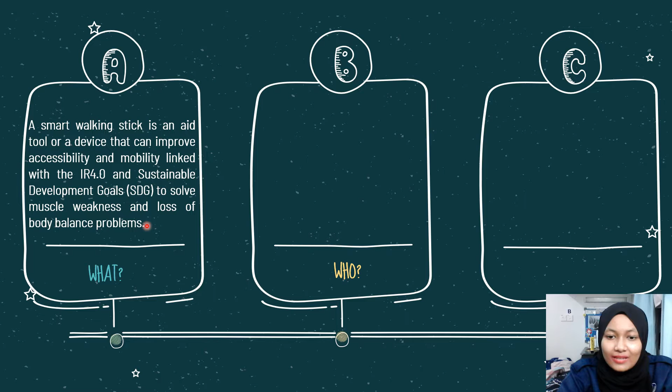Second, who are the main target users for the smart walking stick? The main target users of the smart walking stick are elderly people. So, who are elderly people? Conventionally, elderly people have been defined as a chronological age of 65 years old or older.

Next, how the smart walking stick operates. First, it supports the user's weight while sitting, standing up, and walking. Second, it monitors and tracks user movement. Third, it triggers an alarm if an emergency happens.

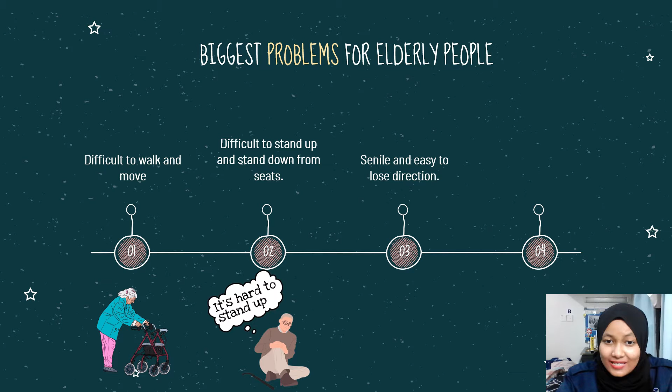The second part is the problem statement. In this section, I only highlight the main problems that often happen to elderly people. There are a few biggest problems or issues that usually happen to elderly people. First, difficult to walk and move. Second, difficult to stand up and sit down from a seat. Third, senile and easy to lose direction. Fourth, difficult to ask for help when falling.

Hello everyone, I will explain the survey analysis part. This survey has been conducted with 100 respondents from walking cane users and relatives of the users. Problems faced by users: for the survey analysis, the majority of the respondents chose strongly agree on the problems. There are not a lot of facilities for senior citizens in their place, by 32.67%, and second, the users have to hold on to something when walking without the walking cane, by 37.62%.

Next, the majority of the respondents chose agree on the problems. The user has to sit after walking for a while, by 44.55%. Their leg feels weak when walking, by 39.6%. And lastly, the user wobbles while walking, by 38.61%. The solutions provided include safety and practicality elements to be implemented into our project and prototype.

For the possible solutions provided, most of the respondents agree with all the solutions, and the highest percentage is the walking cane having a stable element under the cane, by 68.32%, followed in second ranking with 54.46% by the walking cane having a location tracker, which is GPS, global positioning system, to track their location.

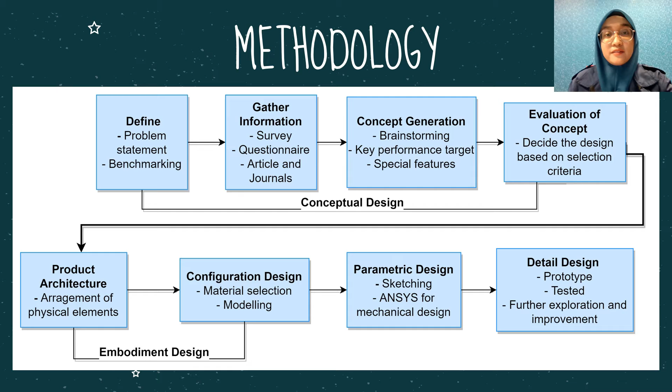Lastly, in detail design, we produce the prototype and test it. We also made some improvements and further exploration to produce the best product for elderly people.

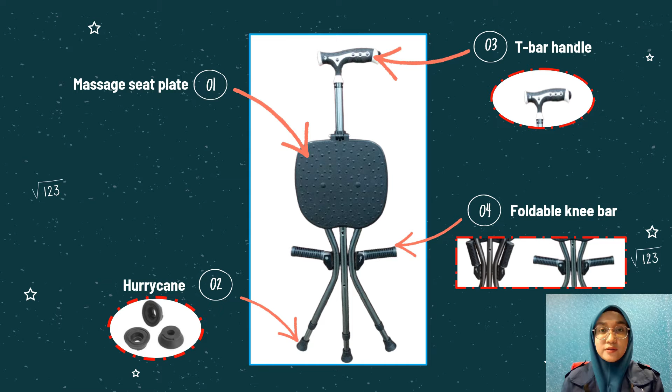The next slide is the selected design concept. This is our smart walking stick for elderly people. The features included in our product are a base plate that can support a maximum weight of 226 kg, rubber feet that work as anti-slip and increase friction when the user is using it, a T-bar handle whose design is comfortable and easy to grip, and a knee bar that can help elderly people whenever they want to get up or sit down without needing other support. The knee bar can also be folded to save more space.

For the LED light, it can be adjusted for high beam and low beam. For the master lock, the user can adjust the height of the smart walking stick at 5 adjustable heights. In the circuitry box, there is storage for the circuit that controls the system of the smart walking stick.

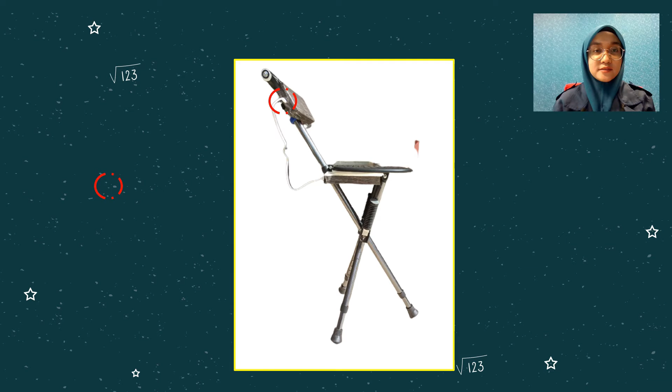Next is the USB charging port. The USB charging port is the place where the power bank is located. The user can recharge the battery when it is at low power. Last but not least, our smart walking stick also includes a 3-leg base to support the user when walking and sitting.

Next, key subsystems. This is the physical decomposition of the smart walking stick for elderly people. From this physical decomposition, there are 4 main subsystems that define our smart walking stick system, which are power supply, Arduino or microcontroller, electronic, and substructure.

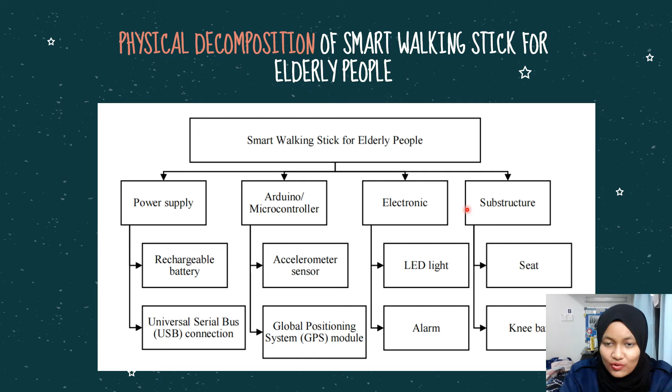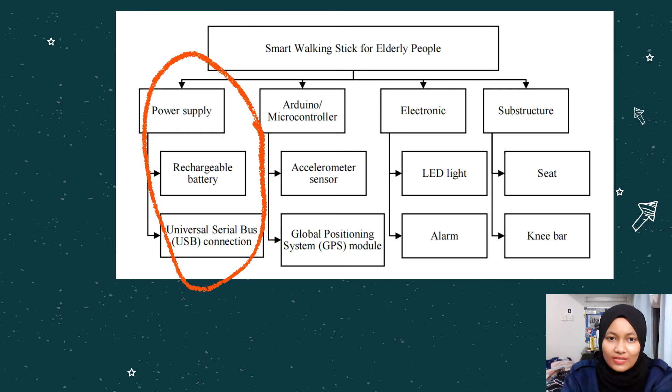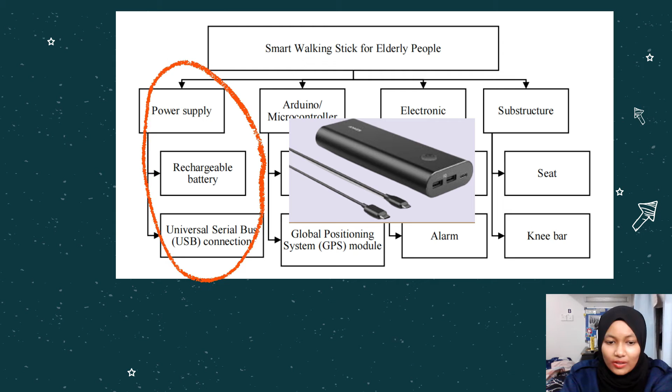First, the power supply subsystem has a rechargeable battery and a universal serial bus (USB) connection. In this project, we use a power bank as the rechargeable battery to supply power to the smart walking stick system. Then USB is provided to carry power as well as a signal to recharge the battery.

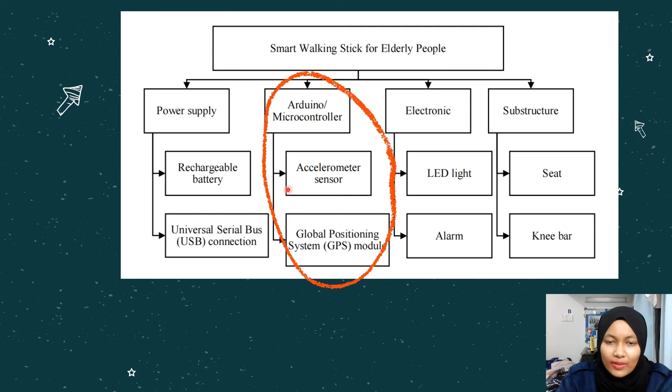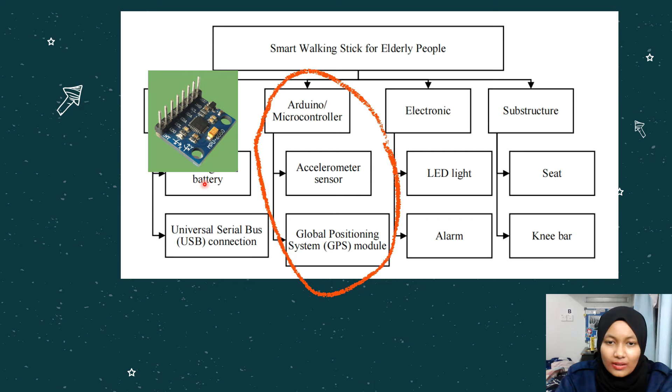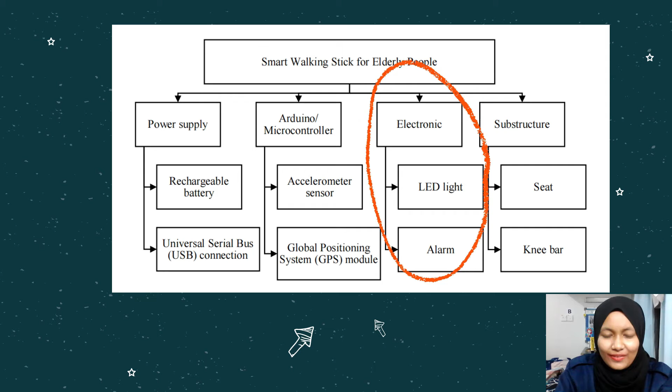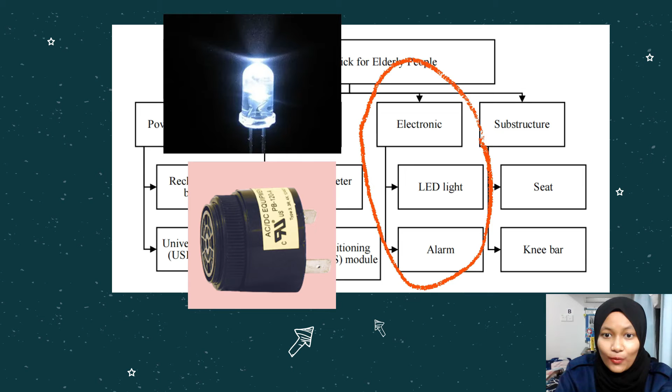Lastly, the substructure subsystem. This subsystem consists of the seat and the knee bar. The massage seat plate is designed to provide extra comfort to the user and prevent the user from slipping when sitting. The knee bar design has an artistic feature that provides balance while users stand and sit.

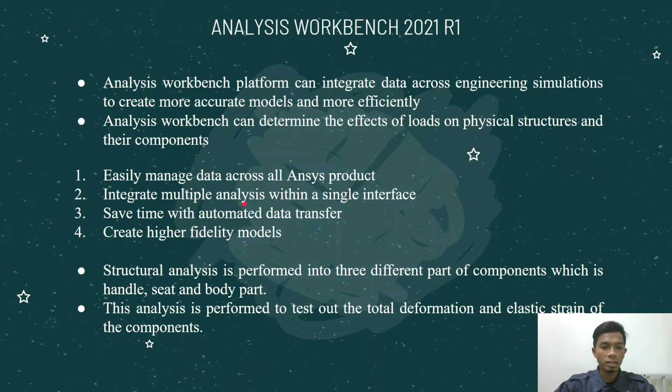Why did we choose Analysis Workbench? First, it is easy to manage data across all ANSYS products. Second, it integrates multiple analyses within a single interface. Third, it saves time with automated data transfer. And lastly, it creates higher fidelity models.

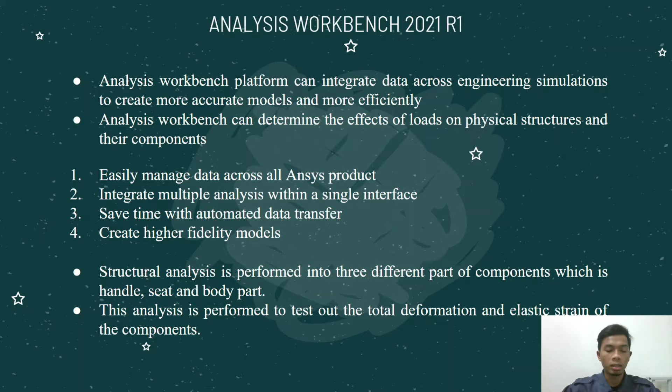In this project, structural analysis is performed on three different components: first, the handle, second, the seat, and third, the body part. This analysis is performed to test the total deformation and elastic strain of the components. Next we continue with the analysis of the body part.

First of all, we input the geometry from CATIA and we select aluminum alloy as our material. Then we mesh the whole body part and we insert fixed support and forces on the body part. The fixed support is applied at the bottom of the body part. Force number one, we apply about 1471 Newton, which is 150 kilograms, at the root of the body part.

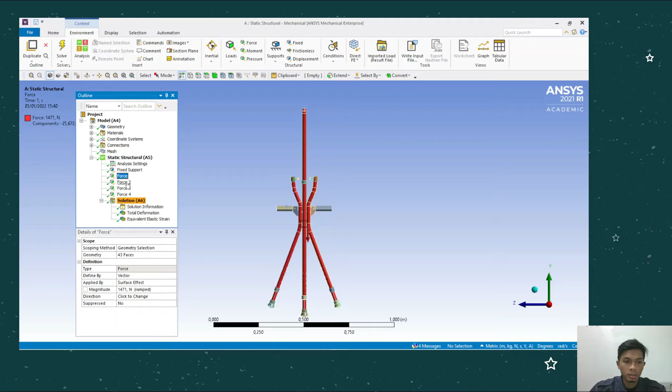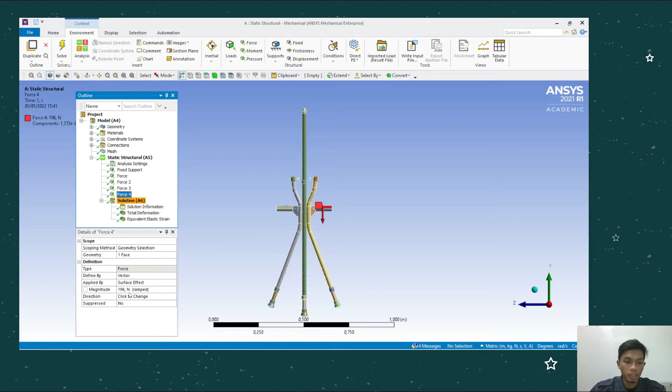Force number two, we apply at the upper body part, which is 196 Newton, and we assume about 20 kilograms of force at this part. The third force, we apply at the left footrest, which is 196 Newton, and we also assume the left and right are 20 kilograms of force, and force number four at the right footrest, which is 196 Newton. To solve for the result, we insert the total deformation and equivalent elastic strain.

For the total deformation, we have a minimum of 0 and a maximum of 0.001718. For the equivalent elastic strain, we have 1.0737 times 10 to the power of negative 9 for the minimum, and 0.001435 for the maximum equivalent elastic strain.

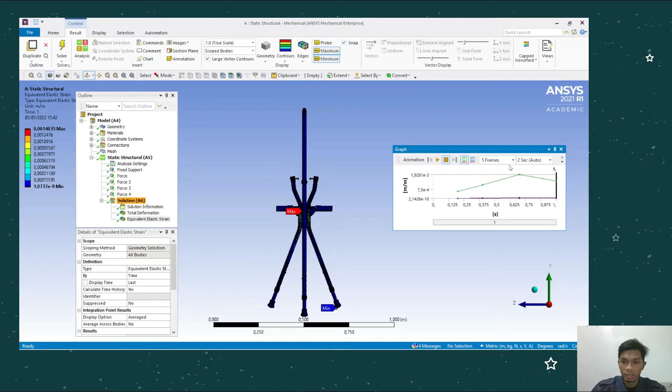We can see the simulation. I set it to 2 seconds. For the total deformation, we can see the graph, which is 0 to 1.1718 times 10 to the power negative 3. Then for the equivalent elastic strain, we can see the simulation. That's all for the body part.

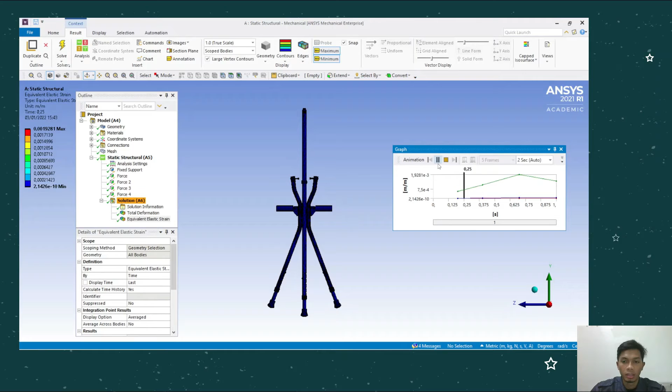I will continue with the second part of the analysis, which is the seat. First of all, same as the body part, we input the geometry from the CATIA file and we select the material. Then we mesh the whole body of the seat. For the seat, we compared the element size for meshing: first we set it as default, and second we set it as 8 millimeters from the actual size of the seat.

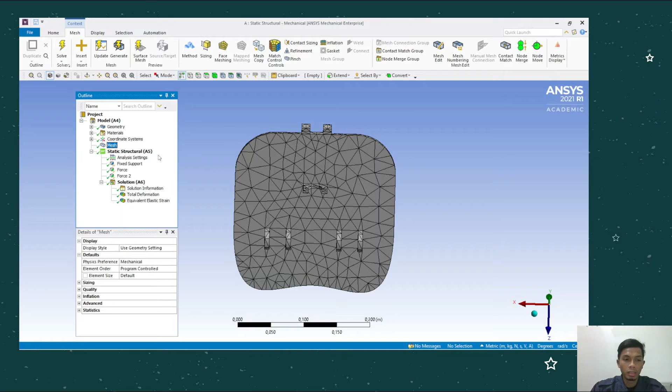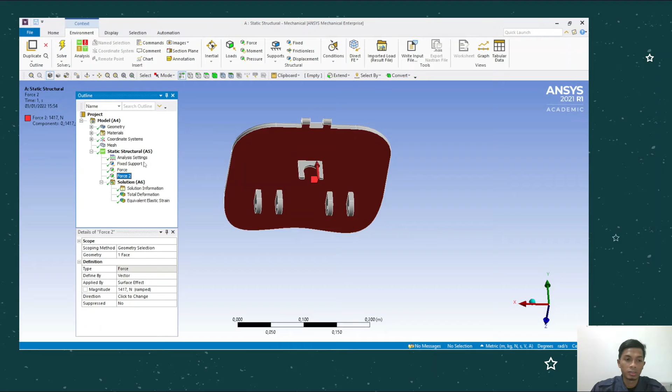Okay, then we insert fixed support and force for the static structure. The fixed support we apply at the hole and this part, because this part will attach with the body part. Then we apply force of about 1417 Newton at the upper, and a second force at the lower, which is also the same, 1417 Newton. Then to solve the result of the analysis, we insert total deformation and equivalent elastic strain.

Okay, for the total deformation, we have 0 minimum, and we have 4.1512 times 10 to the power of negative 6 for the total deformation, and the result for equivalent elastic strain, we have minimum 4.1294 times 10 to the power of negative 8 and 1.663 times 10 to the power of negative 5 for the maximum of equivalent elastic strain.

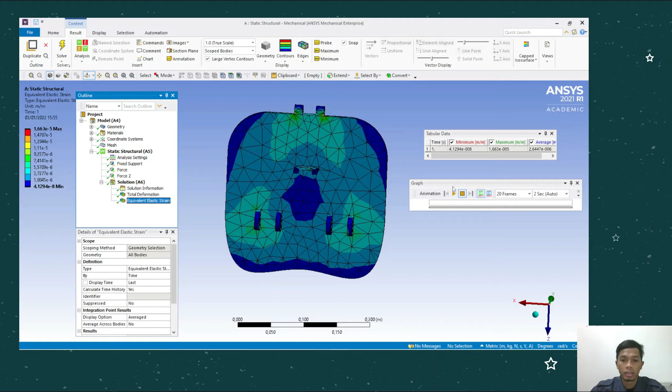Okay, we can see the simulation for equivalent elastic strain, and we can see the total deformation of simulation. Okay, we have maximum result here and minimum result here. Okay, that's all for the seat.

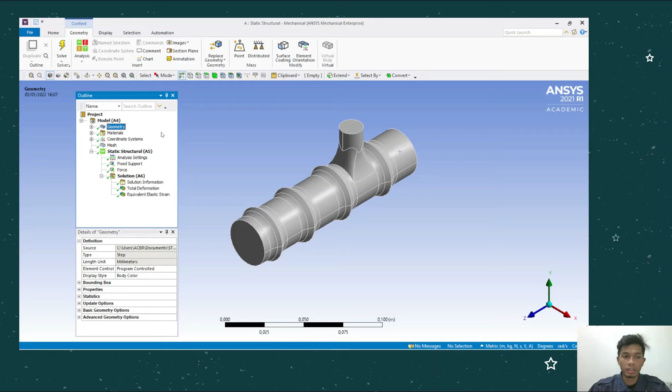Okay, lastly, the third analysis, which is the handle. First of all, we input geometry from the CATIA file and we select the material. Then we mesh the whole handle and then we apply fixed support and force for the static structure. The fixed support we apply here because this part will attach with the body part, and the force we assume at the upper of the handle, 20 kilogram of force, which is 196 Newton. And then to solve the result, we apply total deformation and equivalent elastic strain.

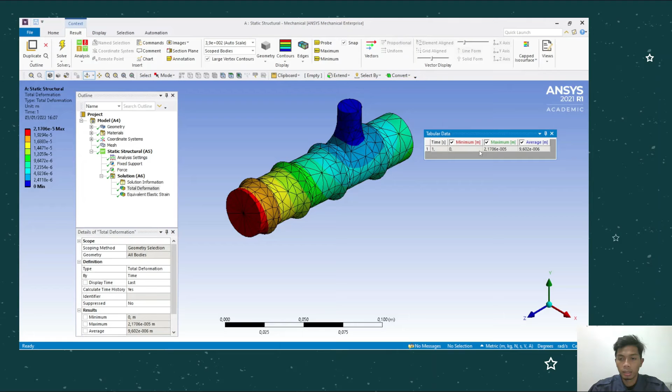Okay, the total deformation, we have 0 minimum and the maximum is 2.1706 times 10 to the power of negative 5. And for the equivalent elastic strain, we have 1.7111 times 10 to the power of negative 8 for the minimum, and the maximum we have 7.7333 times 10 to the power of negative 5.

And we can see the simulation for the total deformation. We have minimum here and maximum at the left and right of the handle, and we can see the simulation of equivalent elastic strain. Okay, to conclude, the result of the simulation is achieved for the design of this project. Okay, that's all from the analysis.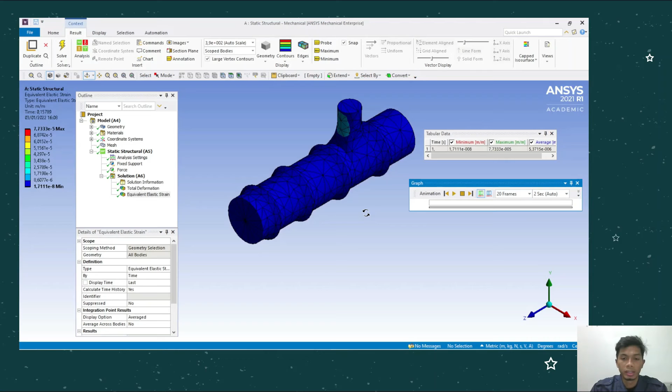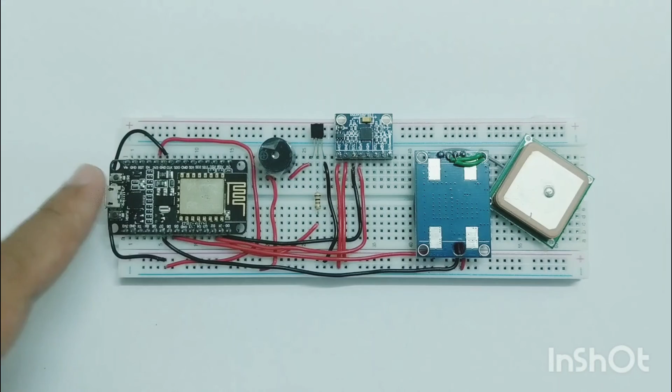Hello everyone. So I will explain about each component we use for our prototype first. So let's start with the NodeMCU. So this is the NodeMCU ESP8266. The function is to connect all the components and transfer all the data through Wi-Fi connection. The second component is the passive buzzer. The passive buzzer is to make an alarm sound to attract others in an emergency case.

And the third one is the MPU6050 accelerometer gyroscope module. The function is to detect vibration or the sudden impact of the user and send the data to the NodeMCU. And the fourth component is the GPS NEO-6M module. This GPS module functions to detect the location of the user and send the coordinates to the NodeMCU. And the other components are a transistor, a 10 kilo ohm resistor, and also the breadboard. And we use single core hardwire to complete the circuit.

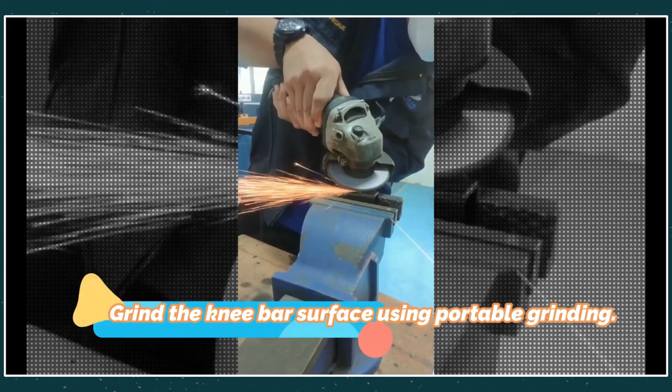Hello everyone. So I will explain about the fabrication process of our prototype. For the hardware part, firstly, we disassemble all parts of the knee bar before grinding. Second, making a hole using a drilling machine of 7mm size to install the knee bar. Third, decrease the thickness of the footrest by 5mm using a grinding machine. And four, all the parts were assembled with the other components, and we go to the electronics part.

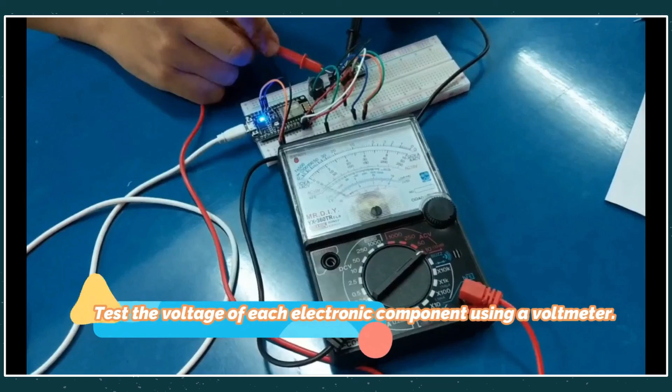All electronic parts were attached on the breadboard following the circuit already created using the circuito.io software. Then we have to check the voltage of the circuit. Next, soldering the male header to the sensor module. And then we go to the assembly part. For the assembly of all components, this process considers all the parts like circuit boards, power bank casing slot, knee bar, and electronic components. So, this is the final view of our prototype, already tested by our team.

And lastly, I will continue with the last part of this section, which is the conclusion. First of all, the prototype is able to meet market requirements such as the product's ability to detect location, alert the surroundings, be user-friendly, and have a system with high durability that is safe and easily portable. Second, the objectives in this project. Firstly, apply the knowledge in study to the community. Second, we have achieved Sustainable Development Goal number 9, which is to develop quality, reliable, sustainable, and resilient infrastructure to support human well-being, focusing on affordable and equitable access. Third objective is the element of IR 4.0, especially for the fall detection system.

Okay, the third conclusion is more research and experiments have to be done to improve the design and accuracy of the system as the technology grows. And lastly, we hope other students and the community make more research and experiments as the technology grows for a better future.